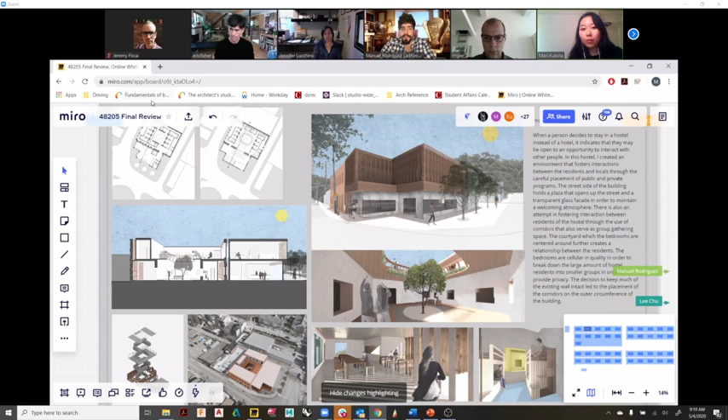My main goal in my design was trying to create these inner and outer courtyards adjacent to the brick shell. I tried to achieve this by pulling in the facades on all sides to create these different spaces.

These subtractions on the first and second floors are also different, creating a sort of overhang to provide some shielding against the elements.

As you can see, the form is quite gestural, trying to pull members of the community along the exterior walls into the main courtyard and into these exterior spaces.

The appendages categorize the spaces and divide the site into three main interior courtyards and a couple of exterior areas. The main entrance is on the exterior wing with the lobby, and the cafe is on another exterior wing, allowing entrance from the more public access areas.

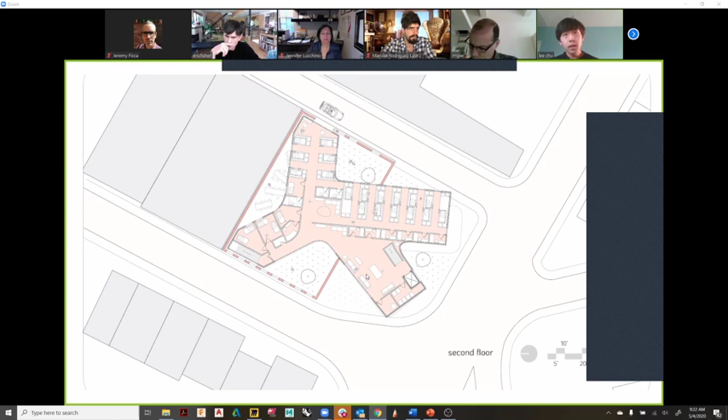The more public areas are much more open, in an attempt to foster a wider scale of interaction, such as this game area, as well as the dining area below, which connects to the outside.

This was just a quick visualization of the first floor. You can see the relationship of the shell and the main entrance, as well as the curved glass, and the interaction that could possibly be fostered in this largely open area. And that's pretty much it.

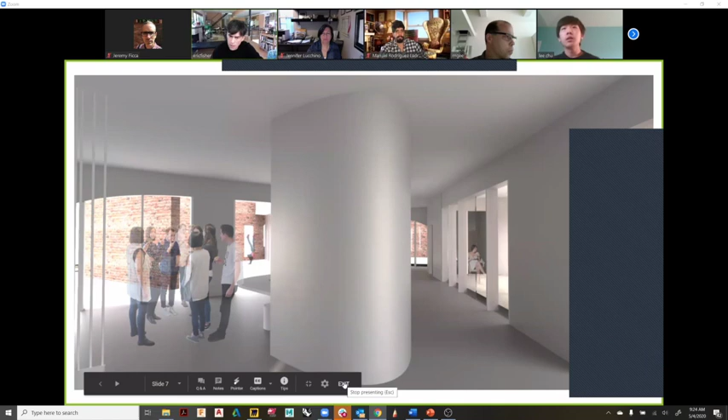Good. I really appreciate the basic idea of your project. I think these organic forms as a whole contrast really nicely with the existing shell. And in plan, especially the way that these organic appendages reach out from the inside to the outside, is strong as well, especially on the inside. I think the resulting spaces that you've created would be very interesting, and again, the relationship of the new to the old would be clear.

That being said, congratulations. But I have a couple comments. First, I think the connection of your appendage in the left back corner, where you have the stair and where it connects to the building, is not strong or well developed at this point. Second, I think you have a problem in section.

You've conceptualized your building as: A, an existing shell; B, appendage shape 1; and then C, appendage shape 2 that's slightly bigger, plopped on appendage shape 1. I would encourage you to think of the entire appendage as a volume, as a single piece that could flow from the inside to the outside. You're thinking two-dimensionally, in plan, on the existing drawings, and the section drawing shows the problem with the conception.

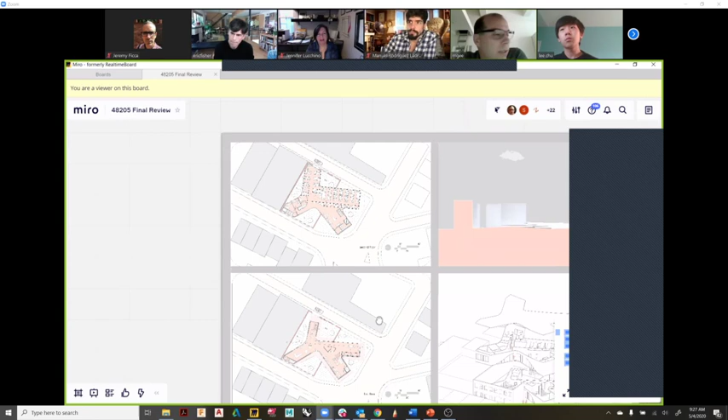Yeah, I agree with that. I think I'll take the point of view that you've chosen to make a very heavy-handed, non-referential design. And if you're going to do that, you have to be very careful about the expression of that amorphous shape relative to the environment you're placing it in.

To Eric's point, if you were talking about this appendage coming from this existing industrial building, I would think at a minimum it would have some reference to the overall street condition, the sight lines on the street, something that would draw you in. I'm not convinced, or at least I don't know from this presentation. If I looked at this board on the wall, I would have no context for why this shape on this site is appropriate.

There's a lot of — you have two giant plans showing, let's say, the adjacent 2 or 3 blocks, but I don't really get an understanding of what those blocks are doing to influence this particular shape. Even with the axons, the real estate for the presentation and the section in particular — I have an issue with the section. When I look at it, all I see is the mauve ground line. I don't look at the building. Roughly 25% of the space, and only 25% of that represents the architecture.

When you make a big gesture like this, there's a lot of responsibility to try to justify it once you leave school. There's nothing to say that you shouldn't make those big gestures, I'm not discouraging that. I'm just saying it's hard for me to understand the rational nature of your plan in terms of the layout of the pods. They're very efficient, but then that's in the context of the larger gesture. It's not to say that big shapes are not valid, definitely not. It's just that you have to be able to convey the reasoning behind them, even more so when you make those big gestures. It's a hard argument.

To do those kinds of things, even in the context not even of the client, but in context of the cityscape and in terms of the lasting impression on the site, if they're bold, they have to be bold, and they have to be justifiable. So that's my two comments.

There's one other comment too, which is that it looks like the location of the entrance is sort of split, there's one on the front, but then another one in the back alley. Now that I think about the back alley, I have some other questions, even for some of the other presenters, but that's a different topic.

I'll piggyback on what you were saying, Mark, about the connection to the community. Similar to a comment I made on an earlier project, I would have liked to have seen a larger site plan. These two pieces are coming out. It's clear when you look at the interior of the plan that you're not thinking of them as axes directed toward a view. But it's also clear, because there are three tiny courtyards on the outside, that you're not really thinking about the spaces they form on the outside. So perhaps there is a connection to the resulting community, but as Mark said, with great power comes great responsibility, to quote Spider-Man, and you really haven't shown that so much.

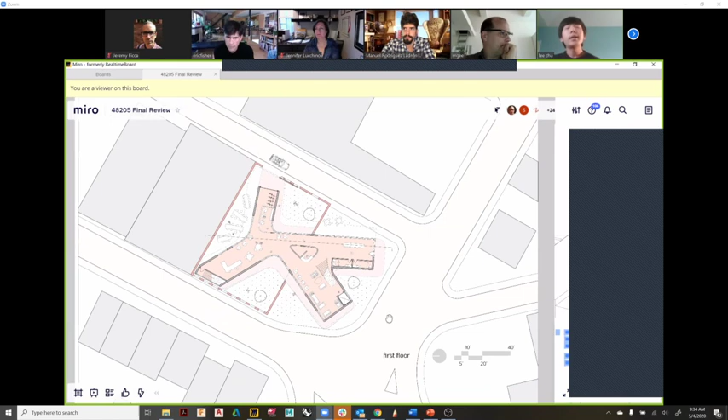Lee, do you have any comment with regards to what you've been hearing from them? I think I mostly agree with everything. Yeah, I do feel that the gestures I tried to create could have been much stronger in actually reaching out to the community.

Hey, what's the material quality of this piece where it comes out? I imagine them as white concrete masses. Does the white concrete — it comes very close to the brick. Did you consider a very light curtain wall structure that might have contrasted more strongly with the brick and could have floated and danced perhaps a little more than this heavier load-bearing concrete structure?

That would make more sense. Oh, I think the concrete might have worked, I'm just not seeing it expressed here. The advantage of the concrete is that you could create an architecture of poché with super thick walls that in places might be even thicker than the existing building.

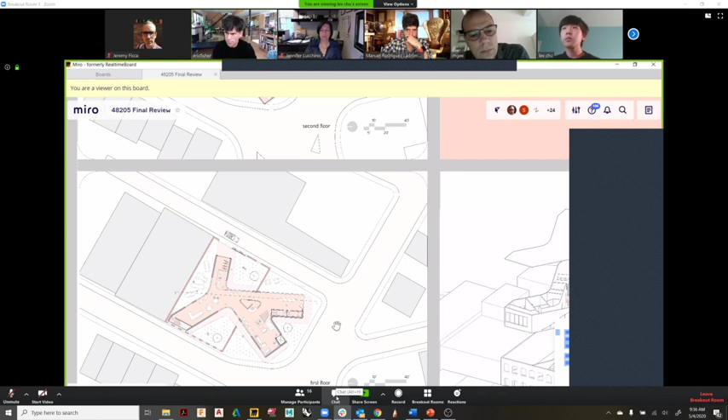Yet that aspect of a load-bearing structure hasn't been pushed by you. On the other hand, doing a light structure would, in a much more straightforward way, contrast with the heaviness and load-bearing quality of the existing wall.

I agree, Lee. I think if you were to spend a little bit more time on this after today, I would be more intentional in the way that we understand materials with respect to the context and to the form of the building itself.

I do agree with the comments about how the building is situated on the plaza, on the public plaza. Perhaps elevating one of those branches up, to let the space go underneath — that would have been perhaps a feasible solution without necessarily losing square footage, or without modifying too much the rest of the building at this point.

This is just some modifications to apply in the future. But yeah.

I had one other thought too — we were talking a little bit, Mark, you and I, about the section of the building and how it could have been pushed much more. It seems to me that those qualities of a building you see in plan as students, but also in real life, you want to push ideas as far as you can, and the organic, flexible nature of your plan does not appear at all in this section.

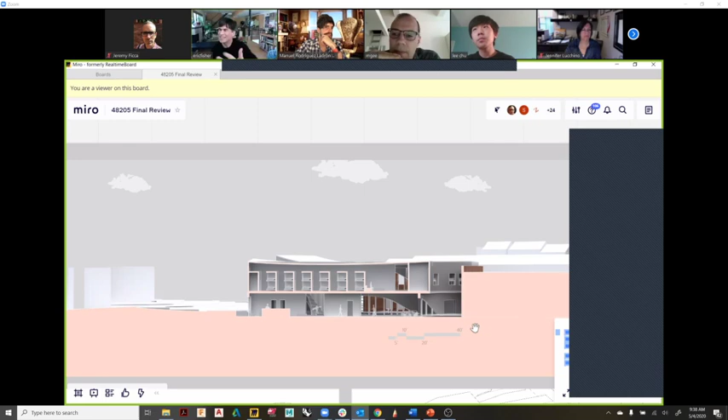When I look at this particular section, if I can focus on the part that — once I get past the fact that there's so much blank space — if I look into that window where you're peeking through, you've rendered it as a gray space, which I'm not sure would be a gray space or if there'd be a material there. What I see in this view is a window into something else you haven't shown me. I see remnants, I think of brick there, and this sort of swooping glass plane — I see it in two stories, but I don't know what happens on the other side of that wall. I want to see that.

And you have three-quarters of the rest of the space to justify why you've made those other decisions. I'm sure in the model somewhere there is a view, and it may just mean you have to spend some time to puff up the reading of those views. But in this particular case, if you do a section and make it gray, and then have a color behind it, your eye says, what's that other thing?

So in terms of presentation, you have to think about how the viewer is going to proceed through your presentation, the same way a person, a human, would experience a piece of architecture.

It's clear you're at a certain point in your development. What I do appreciate about this scheme is the boldness of your initial conception. And you don't have the skill yet as a designer to express those thoughts clearly in section and in three-dimensional form.

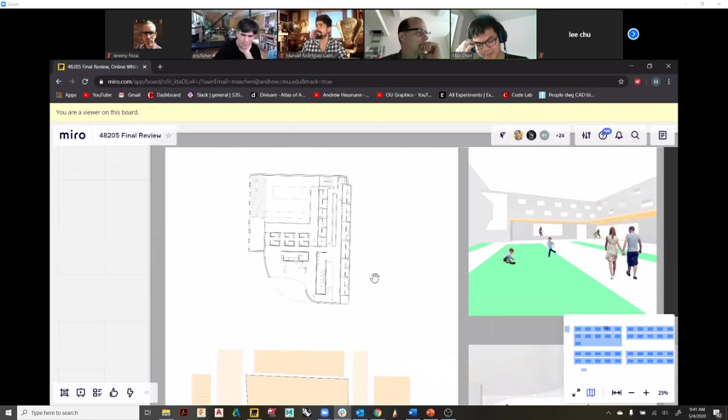Screen. Is it showing? Yeah. Okay, so as Manuel said, my name is Max.

With this hostel project, like the others, I was trying to look at ways to add life to the existing site, and also to an extent where the hostel program becomes a spectrum of public to private, rather than it being binary and black and white.

With that in mind, I created a more internalized scheme where a large extent of the building footprint is located and manifests itself within the existing brick shell, while the pre-existing conditions are largely preserved. The north and west facade of the brick shell are mostly preserved as is, while the majority of the south facade is removed, except for this little portion right here.

There are some changes on the east facade of the brick shell, where my new building protrudes here and there, so it's also mostly preserved. Looking at the plan, what I began with that concept in mind was to create this exterior facade that mimics the street curb, and with the existing vegetation, hint at the entrance towards the courtyard of the hostel.

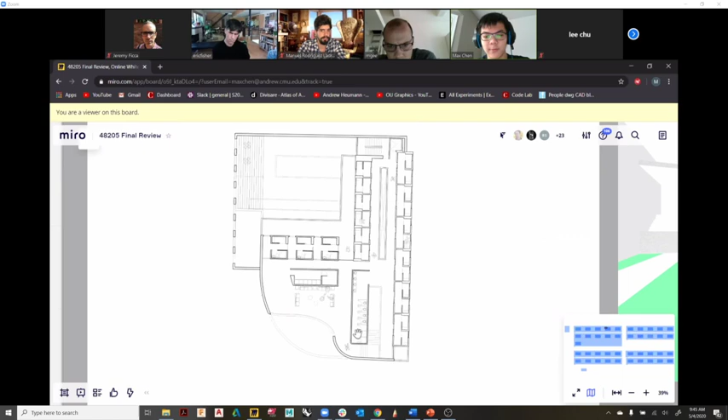There's seating outside of the spaces here, and a balcony looking out towards the large intersection. You can visualize this circulation a bit more in this axon diagram, and that's pretty much it.

Mark, you want to go, or do you want me to?

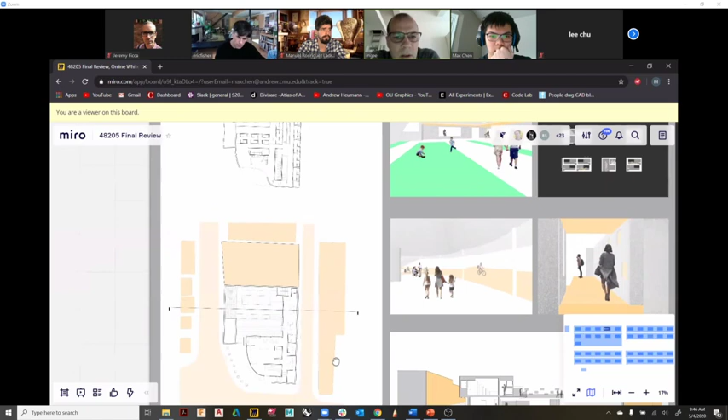I think the first overarching comment is that, and this may be on the screen where I'm not able to see it, but from a drawing and presentation perspective, it's very hard to read the plans. This may be a minor line weight thing or a presentation thing, but it's very important when you do a presentation that the drawings are readable. I can't really tell where the inside of the building is, or what's new versus what's left over.

I think it's just a mechanical presentation thing, a drawback to what you're saying. From a planning point of view, when I zoom in and see the plans, my first thought is that from a scale perspective, everything seems a little out of scale. The spaces are either much too generous. Even the staircases look like they're maybe 8 or 10 feet wide in some cases.

From a planning point of view, even the idea to have one single corridor with all of the bedrooms off of that corridor is a tough one, because it reads like pens as opposed to something in a hostel. I think you want to not be thought of as cattle, but have some sort of interaction with other people, even if it means...

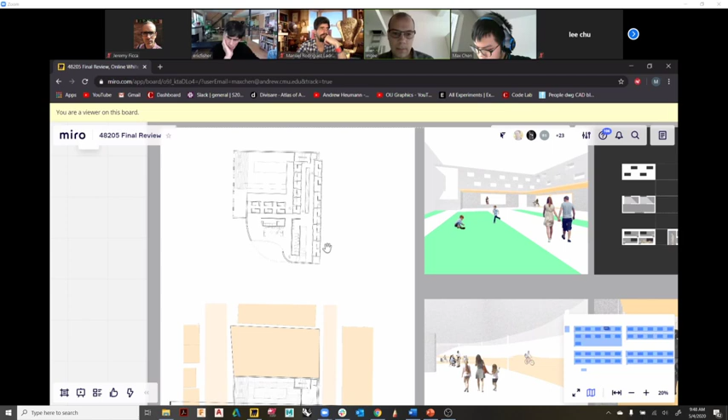I can see this a little better now. I'm looking at some elements of the plan, and I'm questioning this bathroom that looks like it's maybe 30 feet long and only 8 feet wide. When you go to a hostel, you're faced with another person very close, but then you have to walk by them in this really narrow hallway to get to the shower or the bathroom, and you might actually bump shoulders because the spaces are so tight.

These are purely programmatic things, because on the other side of the presentation, I don't get a sense of the materiality of the building, even from these couple of collages that are done. Yeah, I understand, they're not really renderings. They're simply collages.

So in a successful collage, there are 4 or 5 elements, and they pop, and you understand the main things that are really important about looking at that view. If I looked at the one with the green space, just from a collage point of view, I would think lush grass. In the background, I would see brick, and maybe some interaction with people. So that's what that snapshot would do if that's what you're trying to achieve.

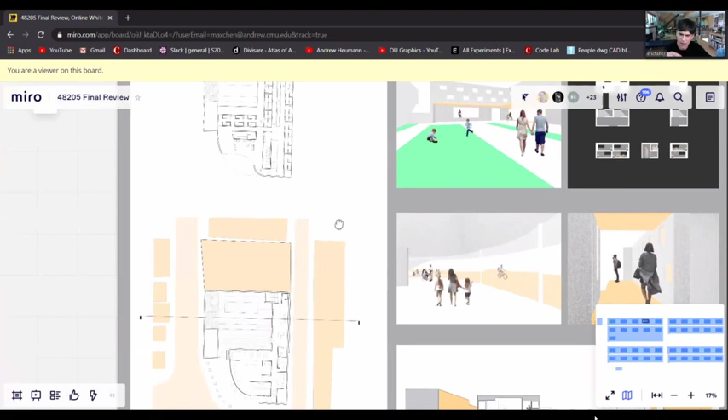This project reminds me of a lot of the projects that actually get built in Pittsburgh these days. The problem isn't that there's too few ideas - you had a whole bunch of ideas regarding planning. The problem is that there's too many, and these ideas cancel one another out as you're drawing them, until the expression becomes so diffuse - watered down - that it's really hard to tell what the meaning of the space you're trying to create is.

The way out of this for you in the future as you're designing is to rely on a much more - this is an opinion - but much more of a parti-based architecture, where you create a single idea that is the focus of your project, that you can express either as a formal idea in model or as an idea that serves as a forming device for making decisions down the road. Then this singular idea ends up forming a hierarchy of subsequent decisions that create an architecture. So I would have loved to have seen a small parti model that would have shown what your idea is.

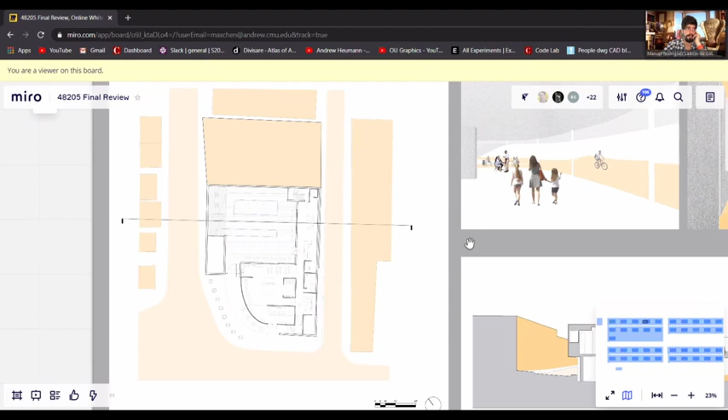Max, do you have any final comment? I agree and understand everything the reviewers have said, that makes sense. I think it's pretty clear that the use of solid colors in collages with no further meaning of texture and rendering makes it difficult to really convey the atmosphere of the place. But anyways, I think it's time to move on.

I'm assuming I'm next. Yeah. All right, I'm gonna share my screen. Eddie, can you increase the volume a little? I'll have my mic up closer. I think this is the maximum I could do. Okay, that's fine, I can do it on my end too. Oh, all right, perfect.

You go by Eddie? Yeah, I go by Eddie. Awesome. I'm sorry, my display is a little weird, so it's refusing to let me go into full video mode.

Okay, all right, we can see it on the Miro. I created a short PowerPoint to explain the general idea. So, I guess I'll just start.

For this project, before I dive into the details, the general concept of the hostel design is creating a separation between the hostel, which is considered private, and the public, which is considered to be the courtyard. At the same time, I'm utilizing the separation between these two spaces simultaneously to act as a bridge to connect the two separate zones.

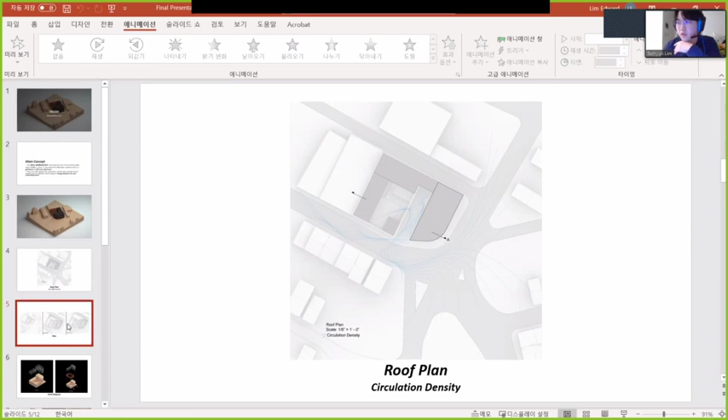As seen in the plans, all the private and semi-private spaces are located on the right side of the mass, with the exception of the second floor, which is connected into the shell and the private mass. I did this because the semi-private spaces, even though still considered private, still break the rule of being completely private. So given that sense of semi-privateness, I felt it was acceptable to put it within the shell where all the public spaces are located.

All the private spaces, which are the rooms, are positioned along the edges of the building on the right side to allow maximum natural light to enter. The first floor, also considered a semi-private space where the gaming rooms and laundry are, along with other remaining spaces, generally has a different window layout on the facade compared to the upper two floors, which are considered the private spaces.

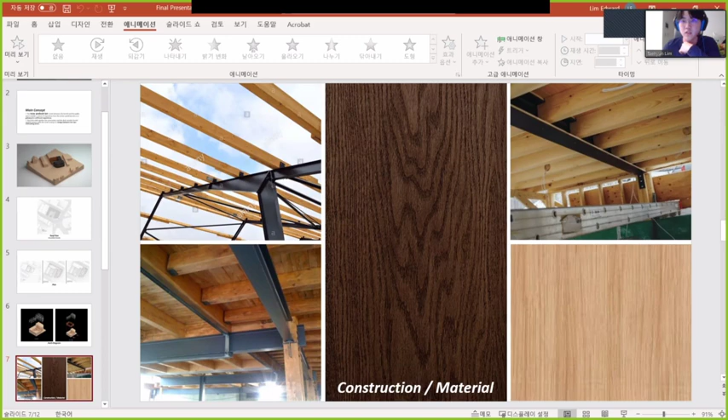The right parti diagram shows that the shell, which is existing, is contrasted against the new private space, represented as a darker wood. For the material, I'm utilizing the contrast between the dark wood and the lighter oak wood. The larger picture symbolizes where the darker wood represents privateness and the lighter wood symbolizes the sense of public. That's also conveyed within the room as well.

The rooms are divided into 2-bed and 4-bed configurations, with dark wood framing each bed, and the space is able to be divided into 2. So even in one room, it's divided into 2 floors due to the height of the ceiling, which is approximately 12 to 13 feet.

And I guess that pretty much sums up the overview of how I laid out my project.

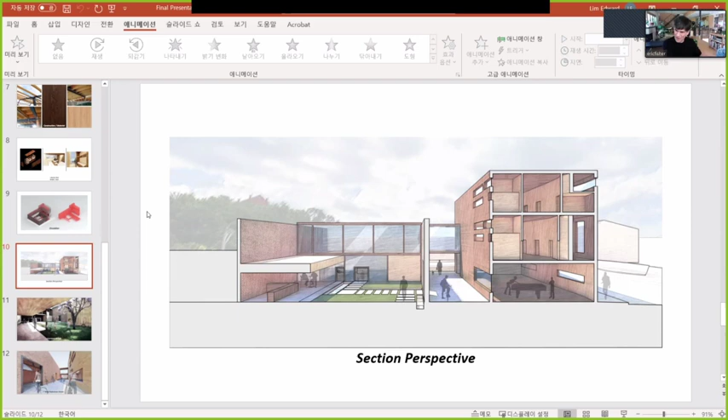I would say I appreciate being a rationalist myself, having come from an engineering background. I appreciate your rationalist perspective. You think didactically and in terms of systems - first A, then B, private, not private. This has formed a strong organizing concept for you to create a larger narrative for addressing the site, and it works in your favor.

The good news for you is in the future, you'll be able to take these didactic, very clear ideas and relax them a little bit as you become more sophisticated with systems - allow a little bit of A in your B, a little bit of B in your A, a little bit of your first floor in your second floor, a little bit of your private and public. But this is a clear way to think about and organize your thoughts.

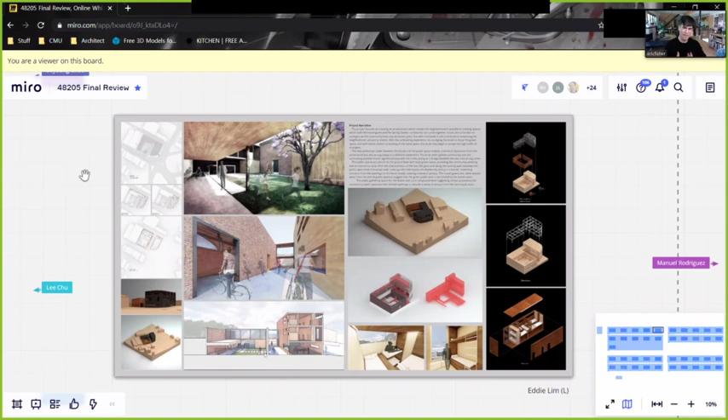That was the first thing I wanted to say. The second thing I wanted to say was that when I first heard you present your ideas, you're taking a very secure existing brick structure that you would think would lend itself well to having a private function, and then you're creating this new thing on the outside and putting all the private stuff out there. As I was first thinking about that, I thought, well, that's a little bit bizarre. Why would you do that?

Then it occurred to me that you might think of this existing brick shell, with its history as being part of the community and with its beauty and spatial quality, as something you wanted to give back to the community and open up. So I appreciate that you've created this new private volume on the outside and opened up the existing brick structure as much as possible. I also appreciate that you've actually expressed the material quality of the brick - I think it's the first time I've seen that.

Now, all that being said, the quality of this new private volume on the outside - I'm critical of the massing and the connection to the community. I think it reads as very heavy, and it's hard for me to understand the relationship of that building to the community, even as I appreciate the courtyard you've created between the existing brick and the new.

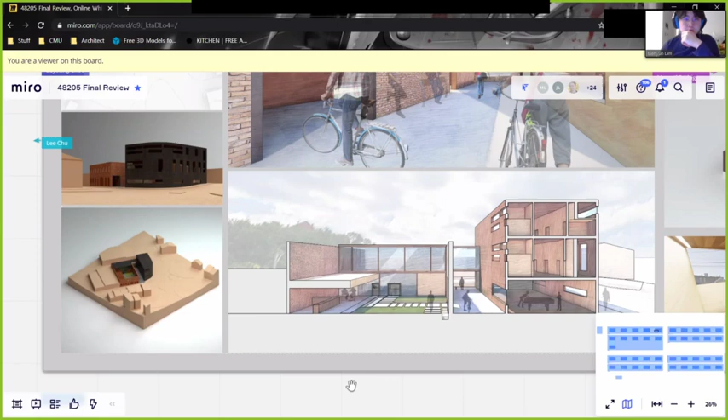I come from a similar rationalist point of view, and I can appreciate breaking down all the components of a program, of a project, of a set of systems. I had a very similar thought in terms of the idea to make this private space outside of the bunker-like space you were already given - maybe he gave you a save in terms of giving it back to the community. I think it's a reasonable sort of out to what is otherwise troubling, or contradicting, to what's actually existing there.

I see, and I think you could spend time to argue the merits of both, and both versions could have a successful execution and dialogue.

I really do appreciate the organized nature, even of just the presentation, to see that there's an idea, and I'm breaking it down in pieces so you can understand the point of view, and then I build it back up with maybe some of the drawings and the models.

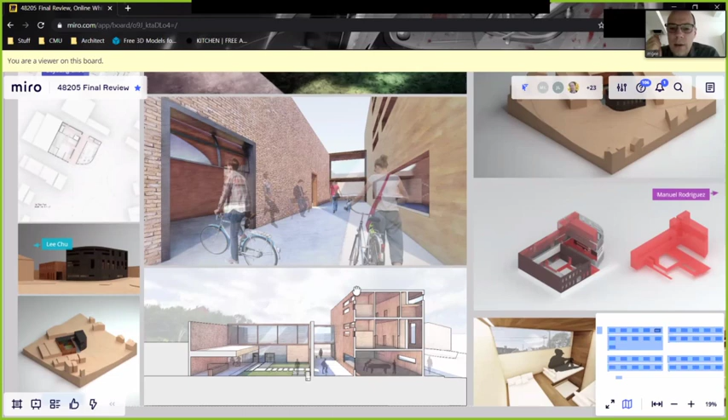I enjoy the idea of having sort of a separation that's an actual separation, and what the space can become in between the two spaces, especially if you draw a line between public and private. That interstitial space is really a critical part of architecture in terms of when you step off the street into a building. I think there's something there you could develop. But even to be able to see what the materials are allows somebody to make a judgment as to whether they agree with the material choices or not.

Similarly, with the woods, by making that statement, by actually explaining to somebody that there is an idea between the two types of woods and the relationships, it allows you to have a dialogue. So it says a lot in terms of thinking on multiple layers, which is ultimately what we wind up doing in the profession. Thank you.

I enjoy the fact that there's a lot of different things going on, and that any one of these little vignettes we could have a breakout discussion on, in terms of taking those ideas to another level. I guess that's where, Eric, I agree with your thoughts about the strengths of this project. I want to take one of the things I was talking about earlier, fully agreeing with your thoughts, Eric, talking about the material quality of this volume on the outside for a minute.

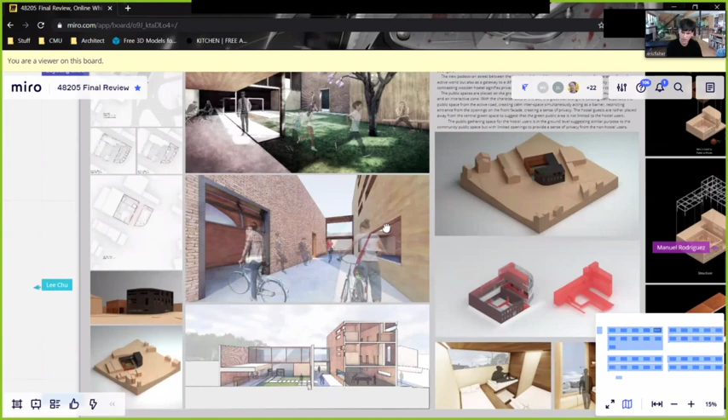The architecture of the brick on the left of this center rendering is strong and heavy and massive. I personally think the reason you would go with wood architecture on the right is to contrast, right? To do something that would be light and non-load bearing. Maybe a timber frame structure, or maybe wood siding over a steel frame.

But instead, as you look at this center rendering, and indeed the perspective model you've done on the right, you can see you've treated the wood walls as though they were load bearing by making the walls very, very thick, and by creating what are called punched openings. Do you know what a punched opening is? It's when you take a load-bearing structure and you actually put holes in it. Paradoxically, creating those openings makes the structure seem even heavier.

I would study what creating a non-load-bearing structure would do. That would allow you to much more flexibly create openings that would create a new architecture that would be lighter. And that lightness would create a stronger connection to the community.

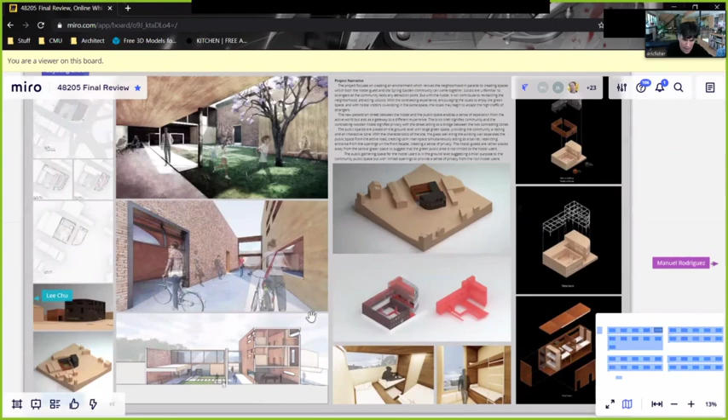You know what I'm attracted to is the axonometric in the middle that shows both the old and the new, that's on the left here, just underneath your massing model. You see that small axonometric drawing? No, that's not the one. Zoom out. Which one? Keep zooming. Which one? Move your mouse down, down, down, and to the left, just a tiny bit. Up, up, up, up.

There's some transparency in that drawing. You're not going there, but there it is. Yes, there's some transparency in that circulation diagram that, for me, is a more attractive expression of your building than this thick-walled, postmodern masonry large structure that you've shown, which is so heavy. There's something light and floating about it. I like the way it contrasts with the existing brick. I like the way you understand this object within an object in this axonometric drawing. None of those things are actually visible in real life at all.

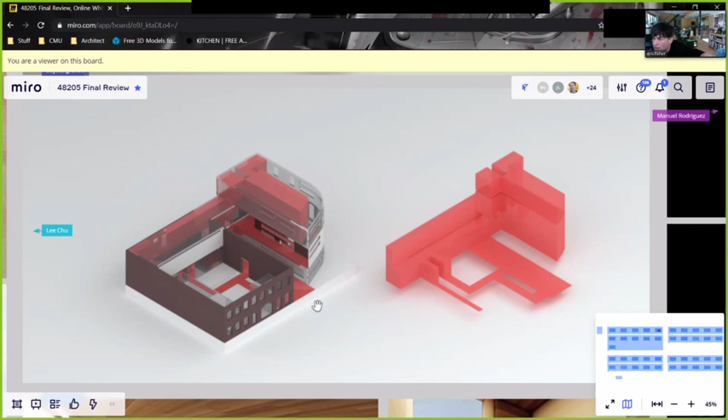It would be nice if, as you develop the building, you began to reveal these elements. And then also think very carefully about the connection of this building to the surrounding community and to the surrounding buildings, so that you develop a kind of contextual relationship, either in opposition to or in agreement with the surrounding buildings. And with your landscaping on the outside and site features back to the building - none of that has been thought about at all. This is where I would go if I were to continue developing your project.

I'm curious, is there a height restriction at all in the neighborhood? I'm actually not sure about that. That was the one area I haven't carefully looked at.

That's a really important thing to find out when you start, because it seems like you've gone an entire story above at least all the other ones, whether by default or by zoning resolution, whatever. They have not gone above the existing structure by that much, but you have a full story above them, which I think reinforces what Eric was saying, that it's sort of this big solid thing outside next to this other solid thing.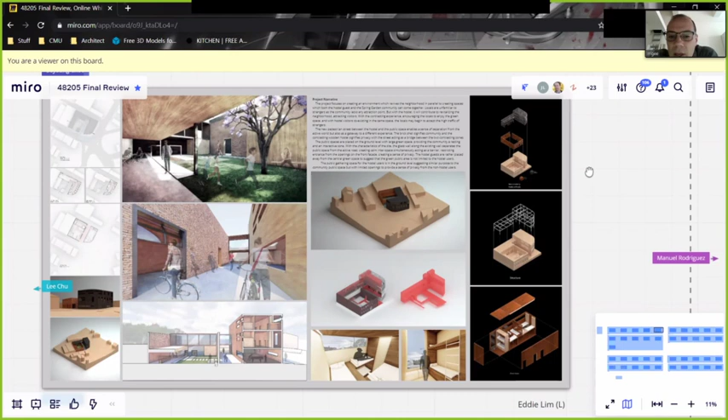It sort of creates a wall to the community. And if you're going to do that, you have to be really careful about how you express that 3-story space next to what looks like an existing 2-story space.

Yeah, definitely. I think that's where the idea of portraying that big mass more lightly may also come into aid in terms of communicating that kind of language to the neighborhood as well.

Yeah, I agree. You've actually created in your structure diagram this idea of what would presumably be a non-load bearing building, yet your exterior doesn't really express that at all.

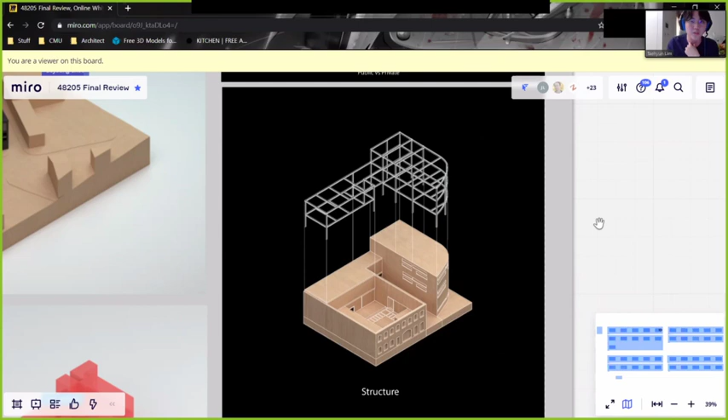Yeah, I looked into combining the steel, having the primary structure be steel with a combination of wood cladding as well, to make it lighter. But when I was portraying that on the exterior, I guess that's where I fell short. Yeah, it's true.

I think the structure diagram seems about right, if a bit static, perhaps. I wouldn't advise you to take the structure diagram and have it be the basis of your project, and then just decorate the structure. That would be overly deterministic.

On the other hand, the idea of having some kind of structural grid that you could deform and break in response to this non-load bearing shell of wood that would be much more transparent would give you the opportunity, because of the strength of what looks like steel construction here, to create much more openness and connection, even between your private areas and the outside.

It's possible to preserve privacy and yet still create the appearance of openness, but it's a tricky game. Yeah, definitely. So, Eddie, with you, we close the first part of the morning review.

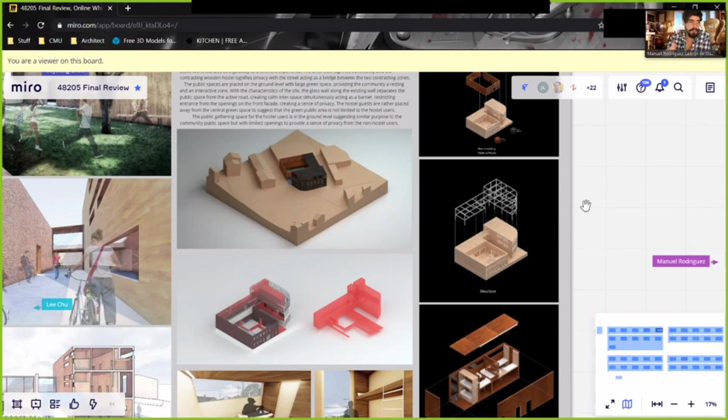As a general comment, I really appreciate the sense of materiality that you have in the project, leaving behind my personal opinion about which material fits better or not. I appreciate that the board at least conveys information about that. Out of this morning session, I think this has been the best example that represents materiality.

Also, I appreciate the clarity of the presentation with your PowerPoint. I agree with Eric that this methodic way of thinking about a project goes in your favor.

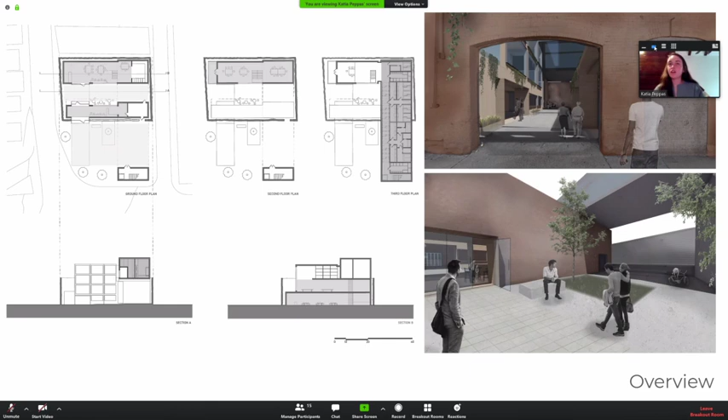My name is Katia, and my overall concept for the Spring Garden Hostel is focusing on bringing in visitors to Pittsburgh and members of the surrounding community, both to this hostel space.

So I want to do that by providing opportunities for events, public gathering spaces that the neighborhood doesn't currently have. The overall concept is a series of stacking volumes which allow for various levels of privacy as a visitor moves up into the building. The darkest gray here would be the most private space and the lighter would be the least private. So as you move through the building, you'd enter the more private spaces as you move up.

Each level seen in the plans here builds in level of privacy. At the ground level, there's a reception area as you enter, as well as a shared eating space. In this smaller volume, there's a public cafe. And then as you move up through the space, there's a library, game room, and finally in the third volume, again the most private, represented by the darker gray, is the sleeping areas.

So the entry conditions shown here are key to the experience of the hostel. The two courtyard spaces that I included are intended to invite visitors and Pittsburgh residents to spend their time here. The top image is the plaza space right on the corner of the intersection that visitors encounter when walking up to the hostel. It's left largely open to allow some breathing room for people who are walking in from these surrounding tight sidewalks.

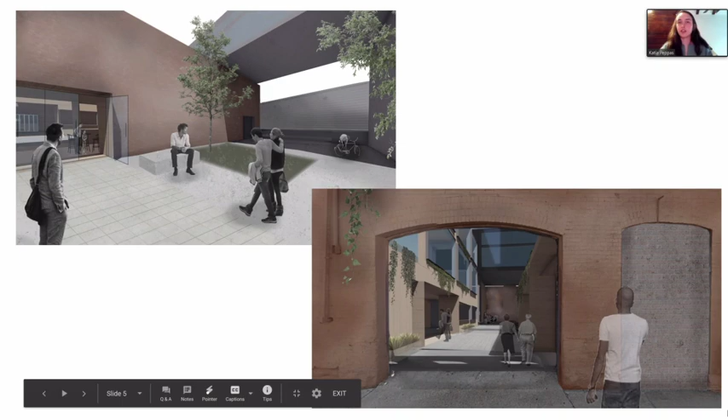And the interior courtyard, shown at the entry here on the bottom, is a place to stay and feel a level of safety and enclosure for guests while remaining outside. This interior courtyard is also shown here in the center of this section perspective, and this really shows the relationship of the existing brick shell to the hostel.

So I decided to detach all of the volumes from the existing brick shell and instead embrace this idea of being inside and outside at the same time when inside this interior courtyard. This space acts as central to the hostel. The other volumes are crowded around it, and it is a nice gathering area.

The contrast of the inside and outside the shell also continues in the placement of the building volumes, as you can see here. So rather than tucking away the private spaces within the shell and leaving the public spaces outside it, the roles of these spaces are flipped. The private is the large volume here, which actually rises above the shell and outside it, to bring the visitors more into the community rather than hiding all of the private spaces inside the shell and not allowing the community to access them.

So the sleeping spaces themselves were designed to provide each guest with natural light, though they're in tight quarters. There's the issue of designing for many beds in a small space, but the way that I approached this was by placing a corridor into the long volume here. Then placing beds above the corridor, light is able to circulate throughout the private and public spaces.

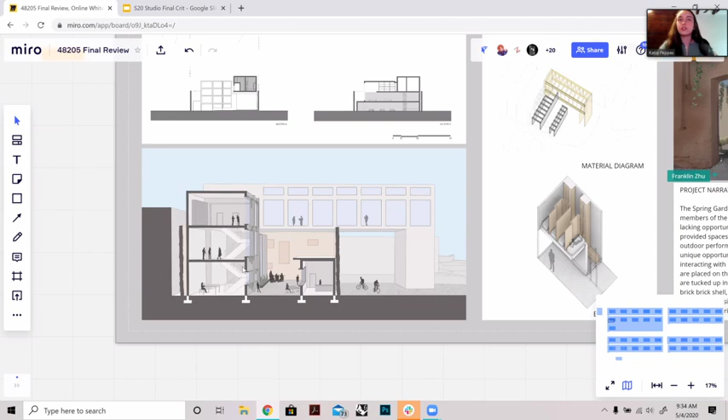In terms of the volumes, I definitely wanted to have this arrangement where there was some contrast between this volume here in material, as well as to accentuate what I've been talking about with the private and public being separate, but of course you can move from one to the other. So that's why this larger volume misaligns purposefully with the other volumes and bridges over it, going across the two smaller volumes.

Did you have any thoughts on materiality of the new forms within the shell?

I was thinking of the larger volume, the private one, being concrete or potentially steel framed, something heavier, and then the other two being lighter. I really liked the contrast of the heavier volume kind of arching over. The idea would be that you can see it's rooted in the ground here, and it would also come on this other side. You can see it jutting out here. So thinking about those smaller volumes being lighter, maybe a wood frame, or if not, at least a wood cladding would be interesting.

I have a couple comments. The first is this idea of encouraging public and private interaction, and its relationship to a hostel program. It's interesting because it actually has a natural generator for that kind of discussion, particularly in an area where you're trying to rebuild urban infrastructure, where there may not be other venues for those types of interaction. Particularly with a hostel, people who go to hostels are usually travelers, museum goers, artists, and in this industrial envelope it lends itself to those kinds of public displays or venues, whether art installations or music. Your identification of this center courtyard as a place where some of that could happen is an interesting idea.

But I do feel also that the entrances, really both of them, could be a little bit more prominent and a little bit more welcoming. They might be welcoming in different ways if they're meant to service different communities, or different types of occupants, but in order to pull people off of the street, there might be something there. I think also the exterior corner space, it seems like in a lot of projects today it seems a little unresolved — I think that's the case here as well.

I think there might be some programmatic intent, but it's still — public spaces, open public spaces, are really hard to design because we want to leave them open and flexible for different uses and different types of people to come in and use them. But especially as a sort of front porch to your building, it could do a lot more to welcome the community and to serve as a welcome mat, to link that space to the interior courtyard space or to the interior programmatic elements, because right now it feels mostly like an open plaza.

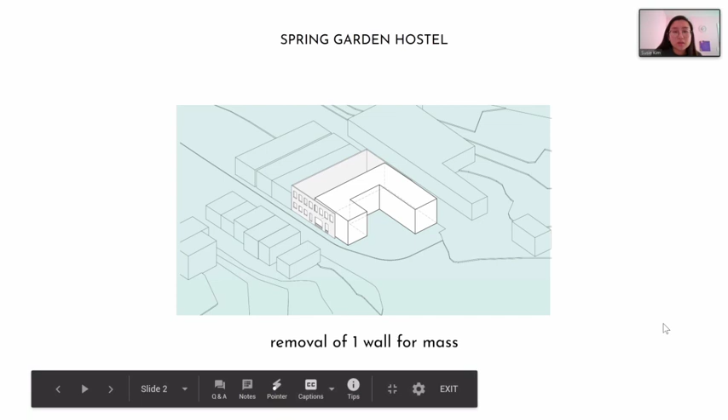So to begin, I wanted to push my mass off of the existing shell and open up one of the walls to create more interaction with the site and with people at large. This creates the presence of two courtyards: one that is an entry court, and one that is a more private courtyard, in part created by the existing brick wall in the back.

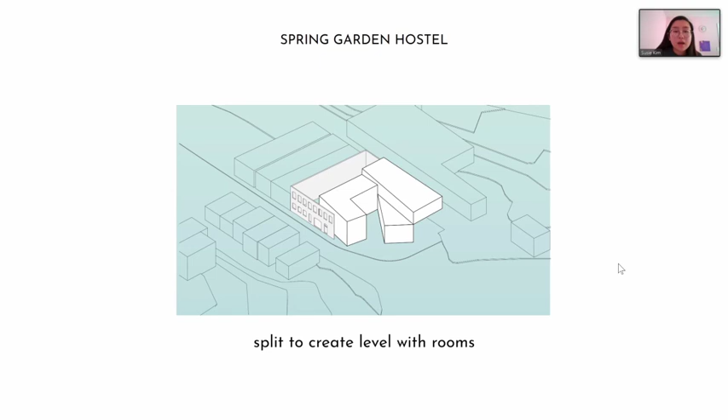Afterwards, I angled both legs of my mass to create a pinching condition, both within this entry courtyard and creating a secondary entrance into the back private courtyard. Then I split the levels and hinged one leg to establish a main mass for the hostel rooms, and lastly extended that to create an overhang within the back courtyard.

So next, looking into the details of the plan. Within the first floor, I hid the entry space on the back of one of the hinged legs. Afterwards, you enter into a lobby space, which is connected into a bike storage service space with a back entrance.

Next, you're funneled into this main space that functions as both a cafe and a seating space. I really wanted to create a transparent middle space that functions as a transient space between both courtyards. Because of the glass on both sides, you're able to see through both spaces, as well as see the pre-existing brick wall that was retained.

With the second floor, I wanted to convey the idea of integrating blocks of private rooms with open interactive spaces with views into the courtyard. These spaces face in towards the courtyard, and here in an open hallway, taking advantage of the natural shape created by the mass I showed earlier, as well as the occupiable roof space, I wanted to create a more interactive space on the second floor as well.

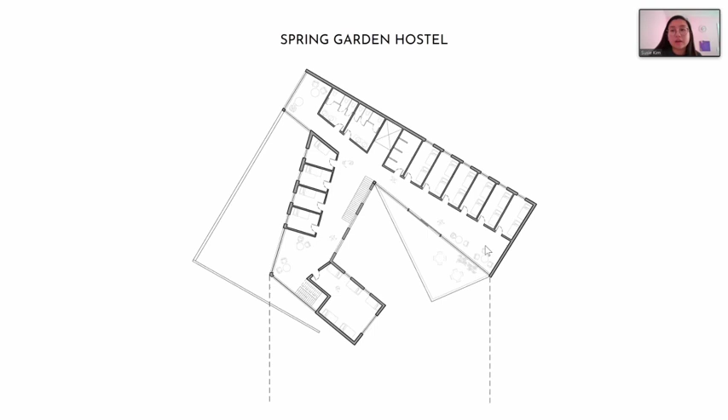So we had talked about this with one of the other presentations too, that the idea of creating this volume that breaks through the existing shell and reaches out into the corner community space. This one is very clear in terms of the volumetric and material choices. It's a much lighter intervention, even though you're breaking through a heavy wall, and the first floor having that light touch to the ground helps when you break through a heavier volume like that.

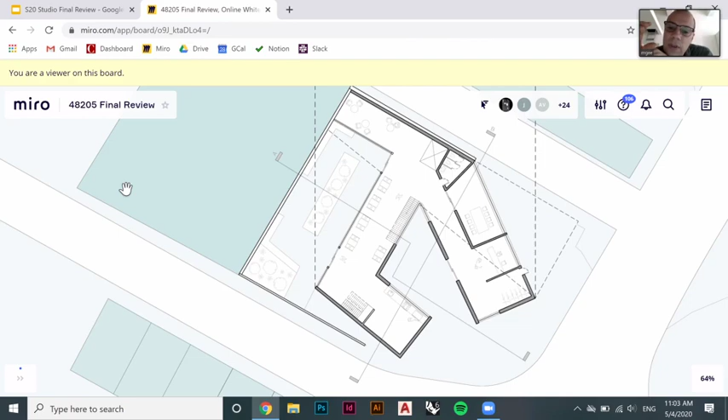I think one of the only other comments might be that there wasn't too much discussion about the actual experience of the main notion of the hostel - the cell that they live in, or spend the night in. I'm sure you have ideas about that, and it might not be a bad idea to see some version of how you intend to actually house the people there, because there's a lot of thought about the public space. The question is how does that manifest itself in these private spaces as well, which is a major component of the program. So that might be some other small vignette or something.

I see that in terms of the presentation, there's a lot of space you could use for additional information. Even on the four drawings on the side there, the diagrams - there's even a double one, and I'm not seeing a difference between the two bottom ones. But in terms of conveying the entire idea, there could be other pieces you put in here that touch on how you're treating the cells or the rooms, something happening in the upper portion there, in the actual circulation space. That might be another avenue to look at.

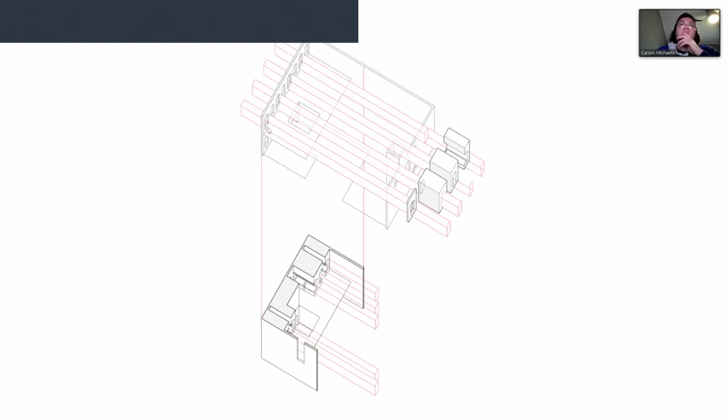So I think that helped a lot to help it fit in. I tried to think of the brick wall as more of a volume than a surface, which sort of happened here on the right. I was originally thinking about these openings in the original facade as more of a volume that could then be subtracted from the cut, resulting in a sort of room that's cut out from the window in the old facade.

So a bed and a space that occupies that old larger arch. So inside the rooms here, I think this helps to create a space with character that really relates back to what was originally there.

Of course, all the rooms could not fit there, so I had to extrapolate that logic into something new. So for the new addition to the south of the old shell, instead of that repetition of the original facade organizing the rooms, it could become the opposite, in which the rooms were packed much more and a lot more efficient in terms of space.

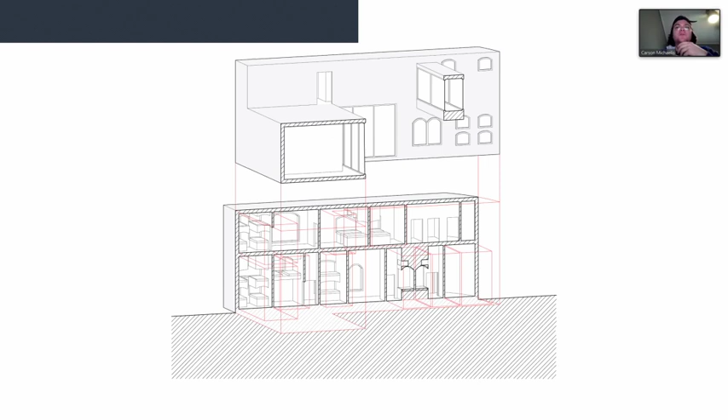But the facade was then able to reflect those changes, which isn't to say that they were unrelated to anything. I think the idea here is that you might have a concrete exterior, which might be paneled or gridded, to which these arches themselves didn't fit -- more of a composition, almost a menagerie towards the end, where there are these brick arches punching through the concrete exterior, holding these glass windows in place.

Moving to the public space, it occupies the ground floor of the original footprint of the brick wall. With that courtyard placed in the middle, it helps to keep the space open but break it up into different areas -- certainly much more private areas, but then spaces where they can still be loud, but not heard everywhere, which I think is important in a hostel, as well as to keep the scale of the public space a lot larger and more characteristic of the original condition by sticking it next to what was already there.

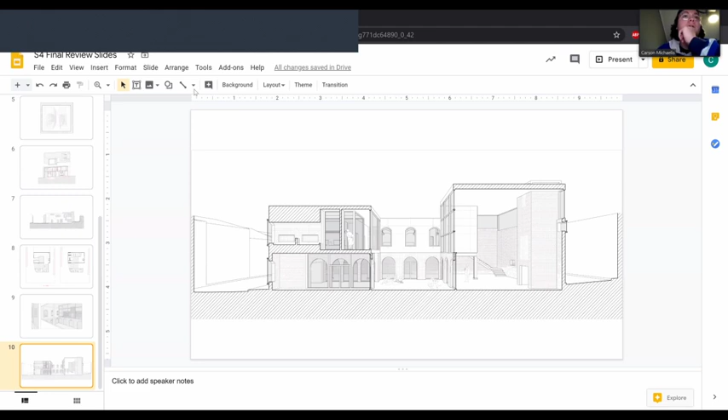Is the intention for a brick structure? With this sort of interior volume held up by some steel columns and beams, but I think a lot of this would end up being brick.

Carson, one of the things I sort of question in looking, especially at this section you were just zoomed in on, is this poché space. You're not designing HVAC systems yet, but there's a significant amount of poché space, and I could imagine that might not actually be full solid volume brick, but might be more utilitarian.

I do sort of question the roofscape as a missed opportunity for you, in part because you're trying to acknowledge some of the surrounding urban fabric of the neighborhood, which is a bit more residential in scale, primarily older construction, a lot of masonry and wood, but there might be a way through this sculpting of the roofscape to also break down the scale of the building a bit more, or read it in a slightly different way.

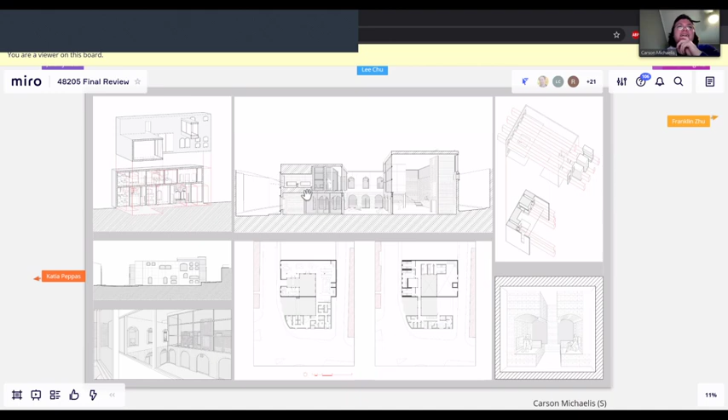I think that's pretty much it. I'd just say, in terms of workflow, there was a disconnect in my thinking. Once I had that original conception of the idea after we visited the site, then after spring break, I came home and got caught up in something new instead of extending that old narrative. I'd love to go back and change the process there in the middle. But that's about it.

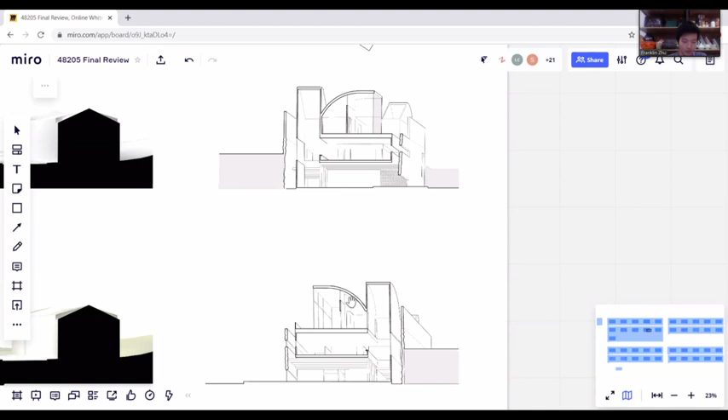This can be seen in the section where, in the south sun, the soft light guides into the private room, while the public space is here, creating a connection between the two spaces.

Super quick comment for you, Franklin, and any other students listening right now. I think one of the difficulties with this format is it's sometimes hard for us to orient ourselves. For everyone, I'd err more on the side of notation, labels, titles for drawings, something to help us connect the pieces to what you're saying and what we're seeing on the board. Your drawings are really clear, and I appreciate that, and I'm starting to piece things together, but it's going to take me a second to match what you're saying with what I'm seeing, in part because it's hard for me to orient myself in these drawings.

Yeah, I had the same comment. There's a lot of shapes going on, and knowing where those shapes are in plan and section would be very helpful. I agree that some form of notation would help, if this is truly a presentation board or something that would have to stand on its own.

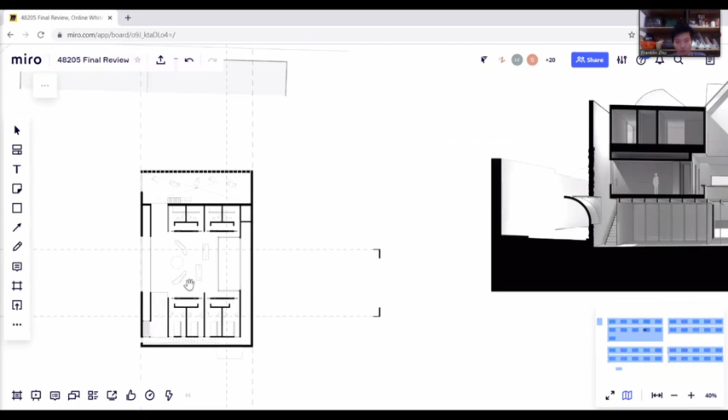Yeah, so his quote was about preserving the site artifact, and the way I interpreted it was, in doing so, I peel away from the wall by creating these gaps that allow light into the individual rooms, but the users of the hostel can perceive this gap as it opens up to the sky. And that's what encouraged me to explore through the section instead of the plan, instead of breaking out from the shell.

But instead of just leaving this curbside alone, I took the opportunity to still engage with the shell and the public. There's a series of threshold spaces, like step-ups, that are proportionally related to the interior, but also flush with the elevation change on the inside, so it creates this transparency where you're in the outside space but can perceive that it draws you inside. That's a way for the public to engage with the shell.

But then on the inside, the shell is also concealed in a way by the new walls, but at each individual room's door entrance, a piece of the brick facade is revealed that pulls you into the space.

Am I correct in reading the drawing that the north wall is demolished? The north wall is not demolished... I took it essentially to create this space. I guess it is demolished in a sense because I took it down, but I was using the brick.

And that's the definition of demolished. Yeah, yeah. So okay, so the premise is that you preserve, but the first move is that you take down the wall. Yeah, to mark a new entrance. So that was the payoff of that.

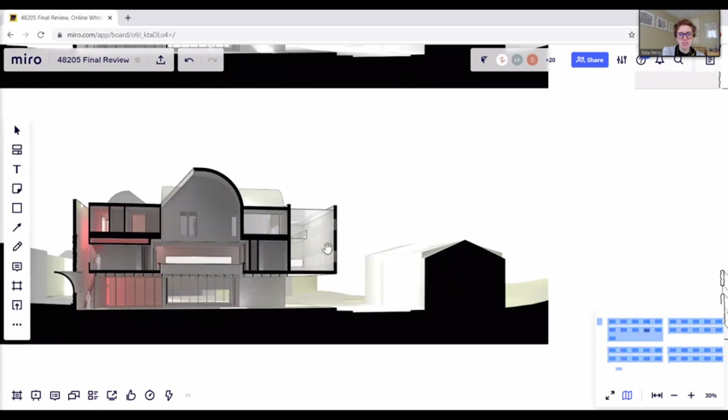And I rearranged the brick to create this, reusing the material in a new way, in contrast to the neighborhood, so that this wall has porosity and staggers the brick to offer, at night, when the glow from the interior emits out, the light activates this wall. So it's using the old brick, but in a new way in relation to the site.

I'd like to just question that one notion and then the section. When I look at the long section in the middle of the page, it looks to me as if you have a beam structure running the short direction, and then a girder structure on top of it providing the cantilever. I'll just say this is something I understand is probably not resolved, but in terms of your initial statement and then the first move, I would question that cantilever and what you've done with it in terms of resolving it.

It looks the opposite. Normally the girders are below, the cantilever's below, and the beams are in between, but it's the opposite here, right? So from a tectonic point of view, you've made a giant move by removing that wall, and then you've created a much bigger issue by putting the cantilever and then putting pieces of that wall above it. I would just question what the ultimate cost to the project is at that cost.

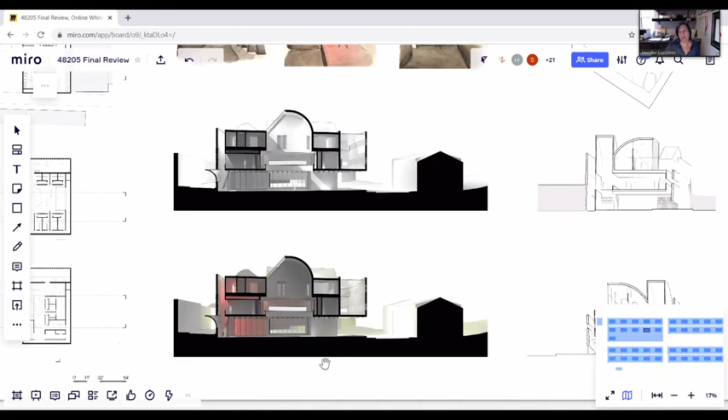And then there's the decision to remove the lower part of the wall, which is a very disruptive move. I know we saw examples of other architects making similarly disruptive moves with existing conditions like that. The bigger issue with your scheme isn't that it's impossible or couldn't work, but I don't see how it relates to the basic positioning or footing you're describing for your project, given the quote you started with. There's just an inconsistency for me.

Quotes are a hard one. As an architect, you'll realize sooner rather than later that they're put in parentheses so somebody can go back and reiterate them to you, for you, or against you. So you have to be very careful that it's the right quote. It starts to suggest, in the hierarchy of design moves in this project, that's the most important one. But when I look at the project, I don't see that as your primary goal necessarily—I really see these featured volumes you're trying to sculpt with light and form.

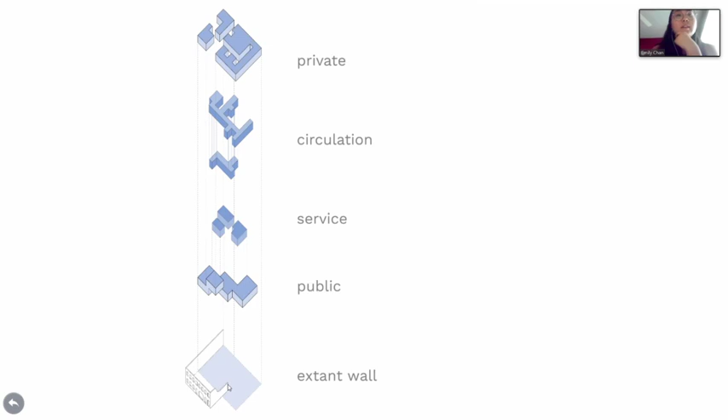Looking at the section perspective, we can see that relationship between the circulation and the public space again, and how this space begins to relate to the courtyard, creating an overhang condition in the courtyard and an open-to-the-air space, similar to the existing conditions within that wall. We can also see the roof condition.

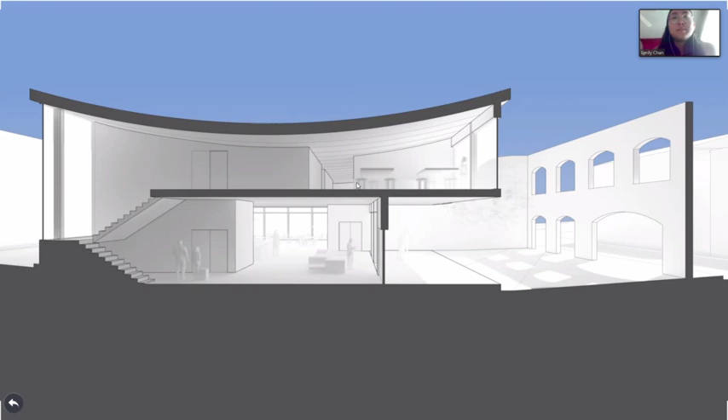Finally, looking again at the entry condition, I imagine this to be a sort of relationship between the entry condition and what's happening with this wall. As you pass under this overhanging condition, it creates a sense of compression, which reflects back to the compression on the existing wall.

We saw the courtyard space in that section perspective, but it actually has three parts: the overhanging space, the open-to-the-sky space, and a semi-shaded space—envisioned as an extension of the floor structure, those floor joists reaching out, reflecting the original qualities of that existing wall and the pockets for the floor joists that existed previously.

And then also looking at the module of the room, because I was very interested in how the organization of the rooms as groups could create layers of private spaces. So how that entry space, which is shared by these different rooms, could be combined to create many different opportunities for community.

So first comment, Emily, while you're getting your Miro board up, I quite like the party as an idea. I don't mind the squashing of the building with the other building. I think that it could have been done a bit more gracefully, especially when I look at that exterior corner rendering of the two volumes interacting with one another.

I wonder if the roof itself could read more, and this is not a comment on the representation, this is a comment on the actual form. I wish that the roof itself could read a bit more as an object perhaps. And right now the volumes seem kind of awkward in relationship to each other, but not in a way I can get excited about, there are awkward moments I can get excited about, but I'm not excited enough about the awkwardness here.

If that makes sense. And I think that this sort of blanket-like roof could be potentially really interesting on the interior, the way you can sort of almost see it in the sectional perspective, the way that the light is hitting that ceiling and the softness. I feel like you could capitalize on that a lot more than you have. And again, it seems like something you've thought about but haven't carried all the way through yet.

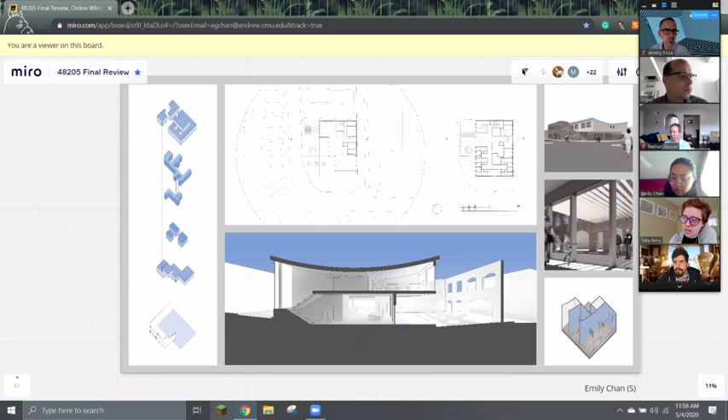I think you could be a little more thoughtful about what in the plan we're seeing as just a black or gray line dividing one room from another, or one room from the hallway. That might be an opportunity to create these layered spaces — you are ultimately behind several layers of screening: a screen to your room, a screen to the shared series of rooms, a screen to that wing. I don't necessarily think that works with how you've configured the rooms thus far, but if that's something you're interested in, you might apply this material approach to really create these layers of space, as opposed to it just reading like a hotel corridor right now.

Something else, Emily, that the room axo suggests is the way you're using the vertical space in the room — I think it has more potential than you've fully exploited at this point. When I look at your second floor plan, it seems like most of the stacked bunk bed spaces are along the western facade, and then there are some larger sleeping rooms with double beds along the eastern side of the site. I think that's a potential area where I could imagine streamlining or reconfiguring that second floor so more of the stacked bunk bed spaces were along that entire western facade.

Maybe you don't need that large shared space on the second floor since you have so many on the ground floor, and you could play with that roof shape so that instead of being quite as equal as it is right now, it could respond to the varying heights of the organization of the rooms. So I don't know if that's clear, but yeah, that definitely makes sense. I think you have some of the pieces and parts to play with — it could benefit from more iteration or recognition of that.

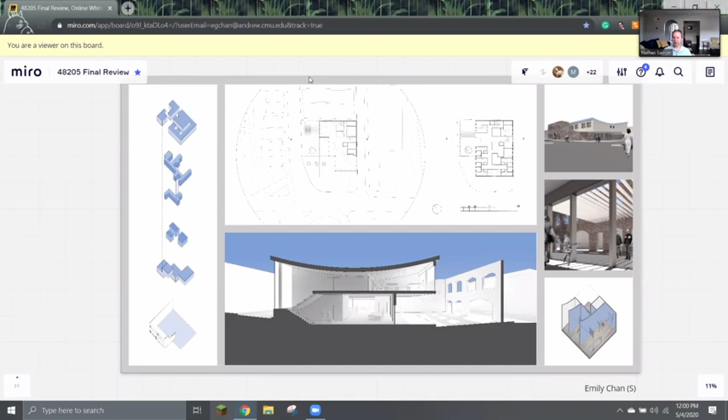So Nick is next. Our last presenter for the morning session. I think we've been joined by the whole group, yeah.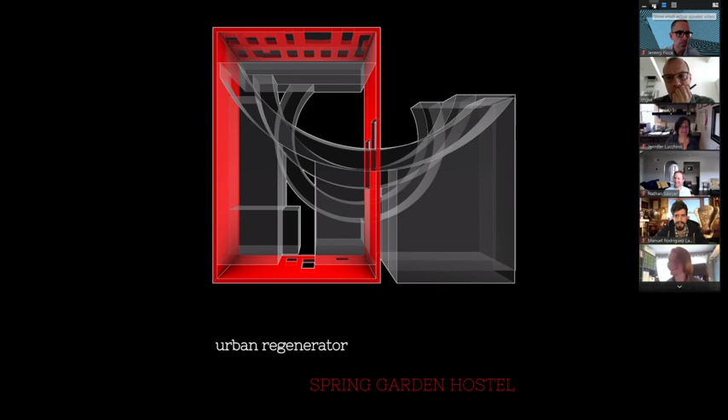Hi, my name is Nick, and as I started designing this project, I really started thinking about the title of the project, Urban Regenerator, and I wanted to find a way to focus on a central space that allowed both the community and the hostel guests to interact.

So I landed on an arced form as a primary move, which contrasts the shell. It also signifies an importance to the central space and allows for circulation around it. This parti is a simplification of the scheme showing how this arced form passes through and spans across the existing shell.

Looking at the ground floor plan, the red indicates the main circulation through the space, and how it comes from the street. We almost bring the street into the site to create an entrance area, and then into the shell where there's a communal space primarily. So you're almost creating an inside-outside space.

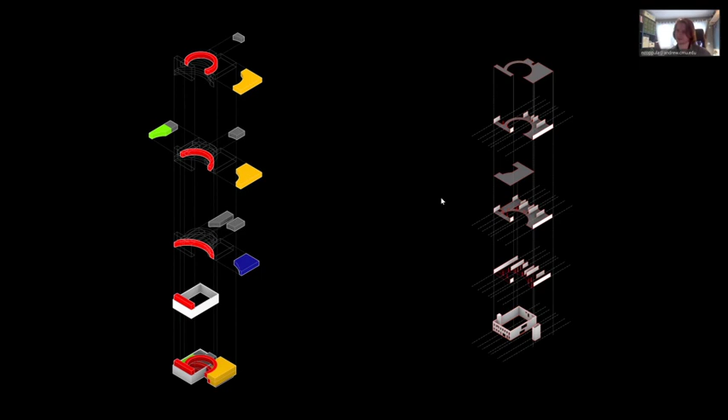The arced form continues its way up through the second and third floor. Diagrammatically, all the program-specific, private, and service spaces link onto this arced form in a series of levels, with the sleeping spaces on the second and third floor, creating a piano nobile effect. Structurally, it relies on a series of columns and walls that fall in one orientation across the arced form.

Looking at the section perspective, we can see a unification of the inside and outside space, and how the inside shell has objects that become the private spaces, but also a large shared communal space.

Looking from the street, you start to see how this settles into the neighborhood. While it largely occupies a large mass outside of the shell, this is somewhat intentional because I don't want the bedrooms, which are in that space, to be sanitized from the urban condition. Even though you come in and there's much insulation, I wanted the bedrooms to still come back out towards the street a little bit.

As we come inside, we see how this arc circulation allows people to engage this communal space and the activity that might be happening there. Anytime they are going up and down or coming from one space to another, they're going to come along this arc and engage with what's happening.

Here we look at the second floor plan. There's a courtyard here, which becomes the private courtyard. Even though this on the first floor is an entry courtyard, there's also one that becomes more private, which you pass through and can actually engage a quiet space, since there isn't much of that in the main area.

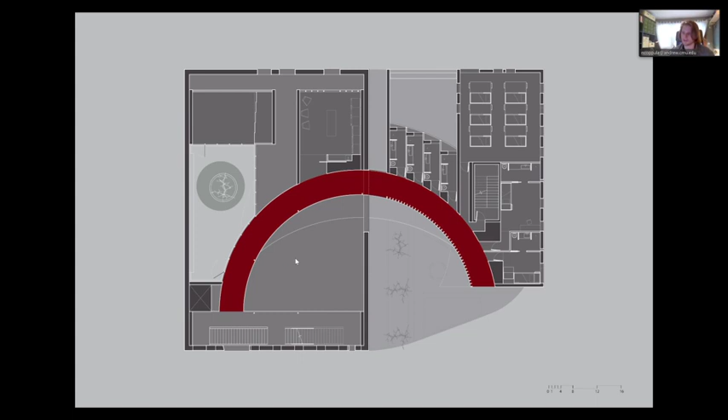Here you get a glimpse from that private space that can be used as a quiet, reflective space to do some business. It can be multifunctional, looking out into this more private courtyard with the communal space beyond.

As we see how the arced space engages with the bedrooms and the private bathrooms, we can see how the various rooms engage the shell. On the outside, where there's circulation between bedrooms and possibly bathrooms, there's a little more privacy created through this screen, but you still have transparency out to engage with the communal space and the community. Here we can see how the bedrooms start to manifest.

The sleeping spaces are all intimate little pods. In one larger area, there are 18 groups of these pods grouped together. The idea is to not create so much privacy or such a luxurious room that you spend your time there. These are more utilitarian, so that people go back to the communal space, back to where the community and the hostel guests could interact.

Here we see that one more time as we move back out from the bedrooms down through the communal space. And once more, we see the outside, where, in an attempt to acknowledge the neighborhood and the building's position in it,

the roof has taken on a shape that acknowledges the base of this valley. We can see diagrammatically here how this building is really placed at the center of this valley, and just a subtle acknowledgement of that with this roof, which has a low point in the center as all the objects come together.

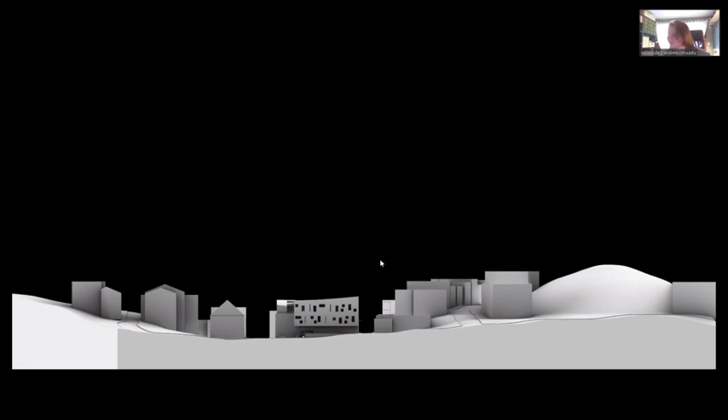I think this is a very strong scheme, both from the smallest scale up to the largest scale. Can folks hear me? Yeah, we can hear you. Good, good, good.

I have a question for you. Did you consider having these arc shapes inflect the plan more strongly? I mean, your thought is that there are these singular interventions that have a different quality on each floor. Yet the plans adjacent to them are interrupted by them, but aren't changed by them.

Did you consider having? I did a little bit in my initial exploration. I think I was yearning for a contrast between the rooms as something outboard that plugs into this arc circulation versus something that spawns from it, so that there was a transitional space.

It's relatively subtle, but here there are these sleeves which compress you in both directions as you go between the hallway and the sleeping space or bedroom. They would be a different, darker material, so you would have this transition space between the arc and the orthogonal, simpler rooms.

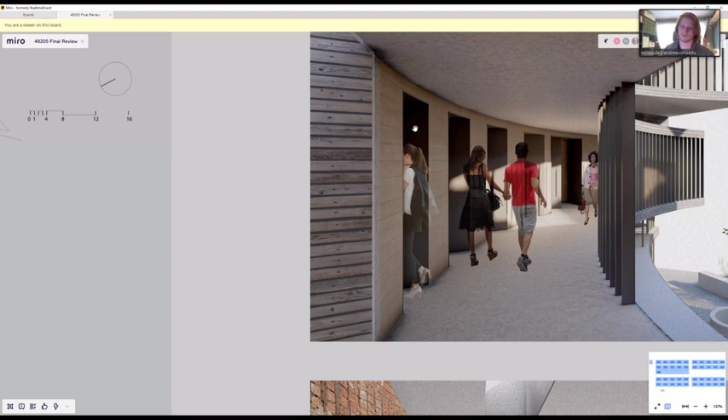Did you consider connecting these arced elements one to another between one floor and the next, rather than expressing each one independently?

Yeah, I actually spent a lot of time on that. For me, at the scale I was working at and where I had ended up with a lot of things, I had a lot of trouble trying to get the pieces to fit with that without them becoming so consuming of space that they became almost this overwhelming sculptural element.

Even at one point, I had this sculptural spiral stair that navigated from one arc to another, that came into this central space. So I still think maybe there's a way to do that that would be interesting, but after a while of exploring, I couldn't quite find something I was ever satisfied with.

I love your scheme. I think the section that you show at the very end is really strong, showing the connection to the community. I had just one thought. It's almost as though, and this is just for me, these arcs that you're showing as your parti, I don't think they're actually your parti.

I think the parti is the resulting curved shape that I'm looking at that forms that very nice section next to your logo on the left side of the page. It seems to me that these arcs are the results of that space creation strategy.

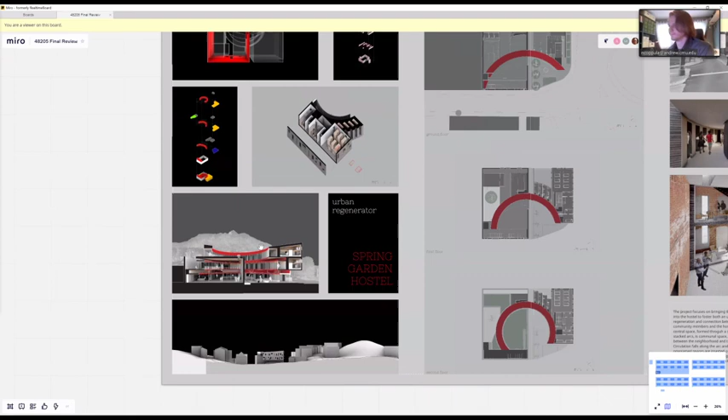Yeah, Nick, I think the public interface that you have, the exterior courtyard space and main entry, and even just how the building sits on the various elevations and streets, is really thoughtful and one of the most nuanced I've seen so far, one of the most believable plazas I've seen so far. I appreciate how, although it is very open, it feels quite protected and really draws you in to the interior of the building.

I think some of the moments I'm having trouble with in this building seem residual, and so therefore not quite developed all the way yet. One of the things I question is the weird leftover space that you get, which seems quite substantial in some places and maybe a little tighter in others.

Now that I'm looking at it, maybe it's like 3 to 5 feet between the tubes and the ceiling above, the kind of roof mass that you have. Let's see if I can zoom into your section, let's see if I know how to do this annotation.

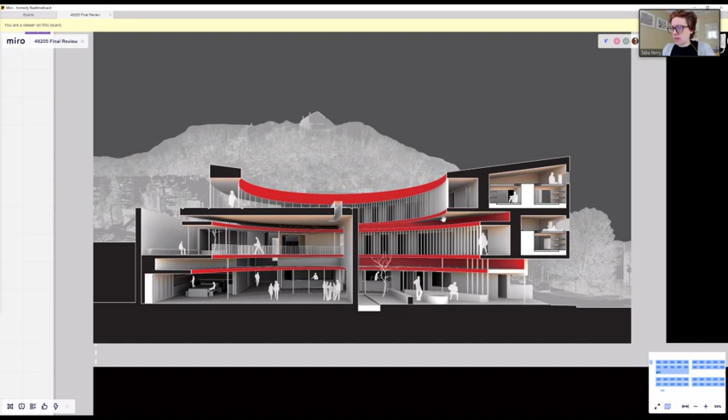I really appreciate the clarity of the scheme in general, and the relationship between the parts is really well developed. I would commend you on that.

Something else I was going to say... I appreciate that the thought process is carried through from the big overall idea down to all the multiple levels—down to the plaza being represented as an extension of the community, the possibility of bringing public space into the courtyard, even that subtle reference to the valley. It shows a holistic way of looking at the program and the site.

When I see a big red line, my initial thought is to question where that line came from. It's not necessarily a criticism, but I wonder why that particular arc, why not a zigzag or a straight line—where this arc comes from when it's so prominent in the design. I question whether, if it wasn't an arc but something else, the ideas would still be strong enough to carry through.

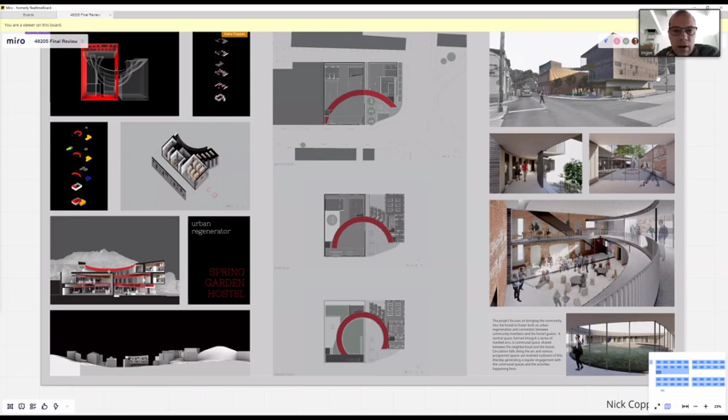In terms of the volumes on the plaza toward the main street, I see that very long white wall with a beam cantilevering out, and I question that piece of the scheme—I think there's probably a more subtle way of terminating the box in the context of the space created toward the old building. It may still have to hold up a heavy box, and you've represented, more successfully than some other presentations, the thickness of structure needed to make some of these moves.

The other comment is about placing this volume on top of the other box. I see in the rendering that you're putting this volume on top of it but allowing it to be separate, its own thing. Anytime you have an old building, you have to be very careful how you place something on it, and I think this one is more successful.

There's one thing you mentioned that I noted—you said the private spaces were made a little tighter to encourage... I don't think you used 'encourage,' I think that was my word, but basically to force people to go outside and use the public space.

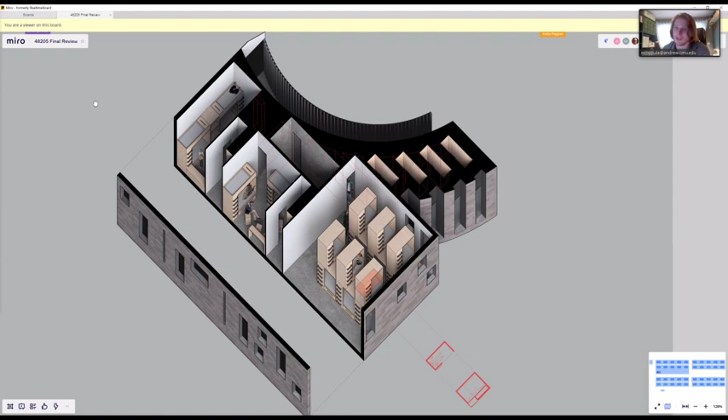Yeah, I don't know if Jeremy is on here, are you there? Yeah, he's there. I wonder how you all will ultimately circle back.

Given the context of what's happening around the world right now, I wonder how the basic premise of the hostel, how the discussion about the hostel changes in this post-pandemic world, and this idea of closeness. The way I remember it when we were traveling around, it was pretty unsanitary to begin with, but this idea of how the program is forever affected by what's happening right now, and how that changes thought process about closed space, small space, common areas, and public spaces. I just think this particular program has a whole other life in the context of what's happening right now.

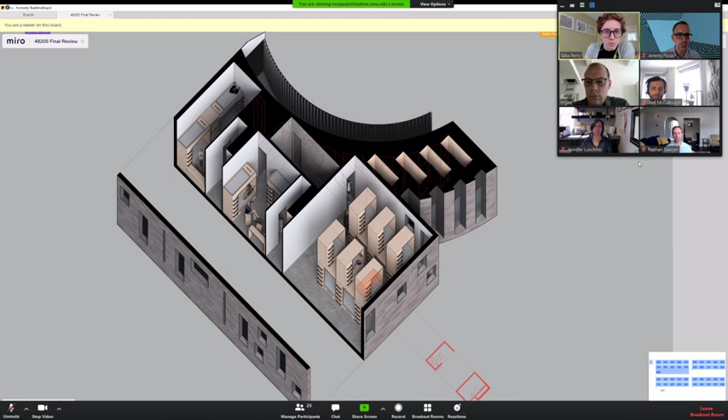That's not to say there aren't digital counterpoints to them, but how different materials come together can obviously be represented in a drawing. Often, especially in second year, you're exploring things like that through model making. When you're working primarily in Rhino or other software programs, it's really easy not to think about that at all, whereas when you're making a physical model, it's always present. So there are issues like that I think could have been anticipated, which were lacking here.

Similarly, these questions of bigger design intent—a lot of these presentations, as beautiful as some of the drawings were, I personally had some trouble with the lack of hierarchy between different drawings. Everything was often of a similar size, which isn't usually the case when presenting a physical series of drawings. So what other graphic or representational techniques can you use to help connect different drawings and understand what might be the most important element of a particular drawing, or of all the drawings on your board? These are really foundational skills you all have and maybe sometimes take for granted, but through this presentation format, it's easy to forget about them.

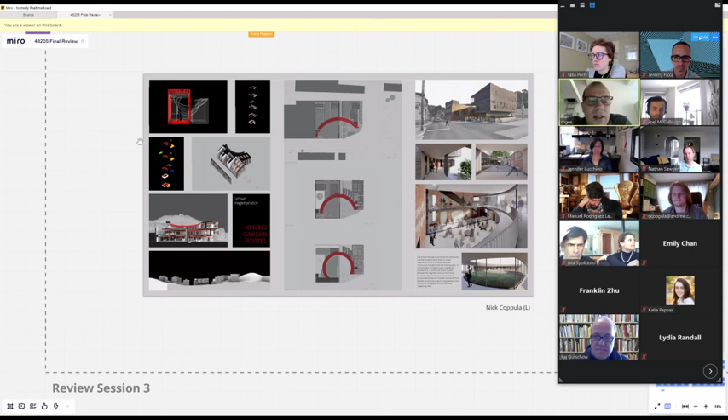You're talking about a piece of architecture that stands on its own, and it doesn't have the architect to walk you around 99% of the time. Those moments and those layers have to be apparent, and that's ultimately the hardest thing. It's the thing we do every day, and it's the hardest thing to do every day: make the drawings convey something that they aren't, which is a built space. It's not so easy.

I'll chime in—I saw most of it and didn't want to interrupt the other reviewers. I'm Kai, I teach in the school as well. I think the Miro board as a whole set of drawings is a really useful tool. And when the students take over and show us one slide at a time, that provides a narrative, but we also need to be able to see other drawings at the same time. So I think that's something we need to work on, for reviewers as well as students, so that we see what the student is talking about, but also, when we're present in front of the whole board, we can quickly dart our eyes to the plan, or the section, or the model.

The other thing is, one of the pieces I didn't see very many drawings of—it's difficult to do—but I'd encourage the students, now at the end of your second year, to take some of the experience from the first half of the semester of molding something with your hands that's flexible or malleable, putting sticks together, folding something, and use some of that tactile, haptic sensibility to, if not actually make something at home using a napkin or a straw or a piece of cardboard you can find around, perhaps model at a different scale some of the physical material things. So what I'm missing is a view of something that gets put together—not a floor plan, not a section of the whole building, not a view of the neighborhood, but something at the scale of a door frame, or a wall section, or how two materials come together. That's difficult to do without a lot of experience.

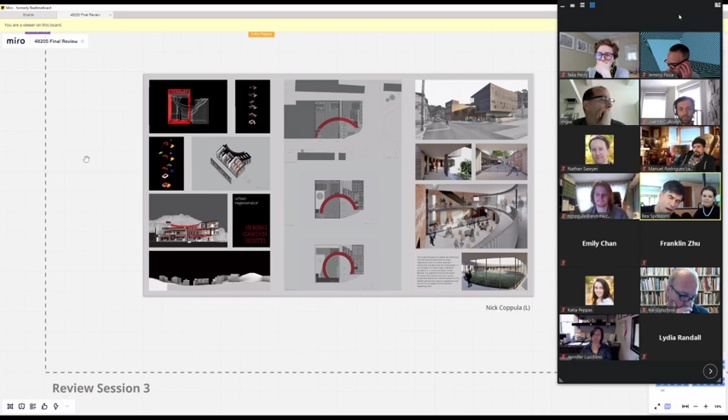One of the advantages of working in a model is that you can more easily, when you're not so experienced working with all of the software we have, develop a hierarchy of forms. I used to focus so much on the details of the computer models, it was at the expense of the overall picture that becomes clear really with a physical model. And Kai, to your thought about what we can see and can't see as critics looking at these boards, it would be nice to be able to follow the process of the students so I could understand their intent better. What's sometimes missing in these presentations is some idea of where the students have been in the past—it's more of a snapshot of a single moment in time.